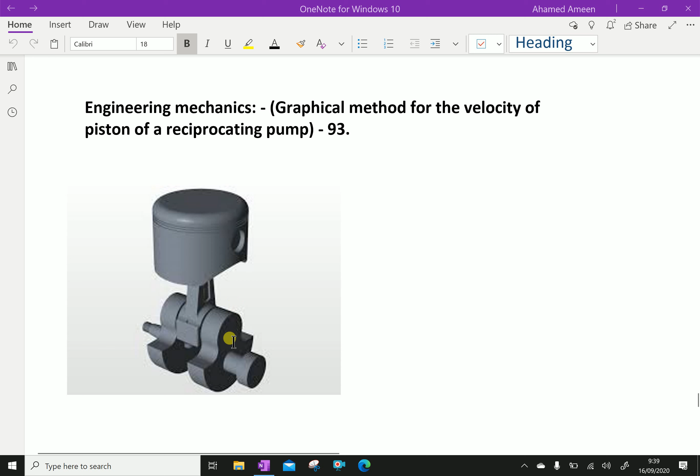In engineering mechanics, let us discuss the graphical method for the velocity of the piston of a reciprocating pump. Look at this piston crankshaft arrangement, where the rotational motion of a crankshaft is converted to reciprocating motion of the piston. The piston is connected with the connecting rod to the crankshaft.

We have to find the velocity of the piston using the graphical method, as discussed below. Look at this figure. This is the crank, suppose here AB is the crank. Then point C here, and BC is the connecting rod.

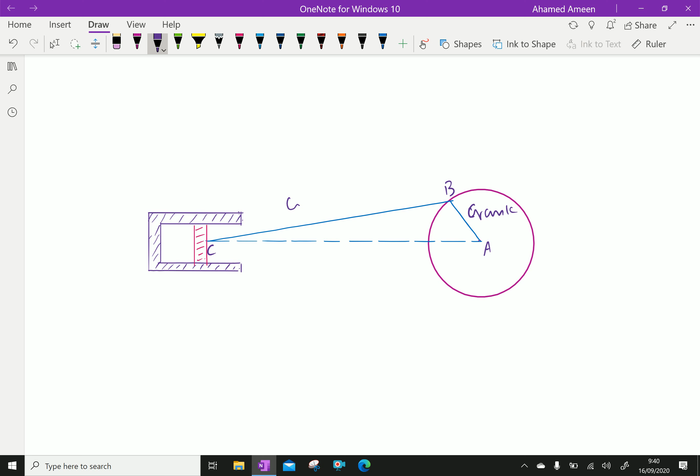Due to the reciprocating motion of the piston, it is converted to rotational motion of the crank. Let this be VC, the velocity of the point C in the horizontal position, and let this be point D.

Now here the crank AB makes angle theta at a particular instance to the horizontal. Now the crank is rotating in this direction. First of all we have to select a suitable point A, which is the center of the crank. Draw a circle with radius equal to AB, that is the crank length of the mechanism.

This is called the crank length mechanism, AB is the crank length. Through A, draw a horizontal line meeting the circle at D and extended. This DA is the inner dead center, and the line AD is extended up to point C.

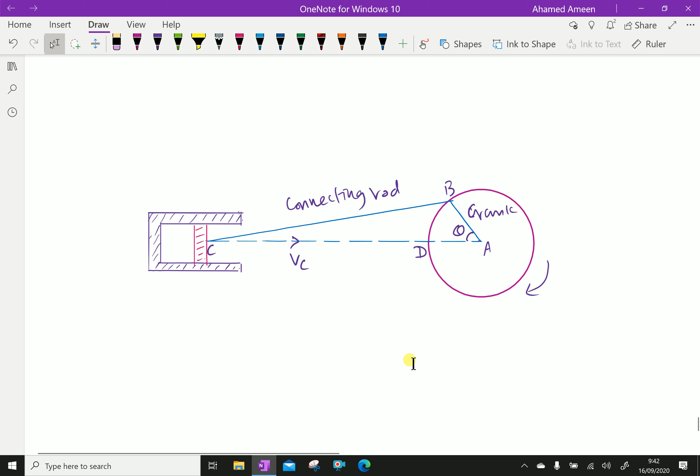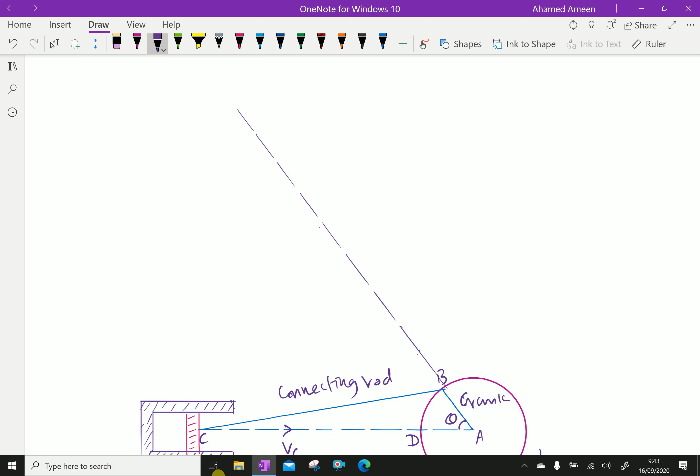We have to draw a line connecting AB. From this piston, draw a perpendicular, then join them both. Let this point be O, that is the instantaneous center.

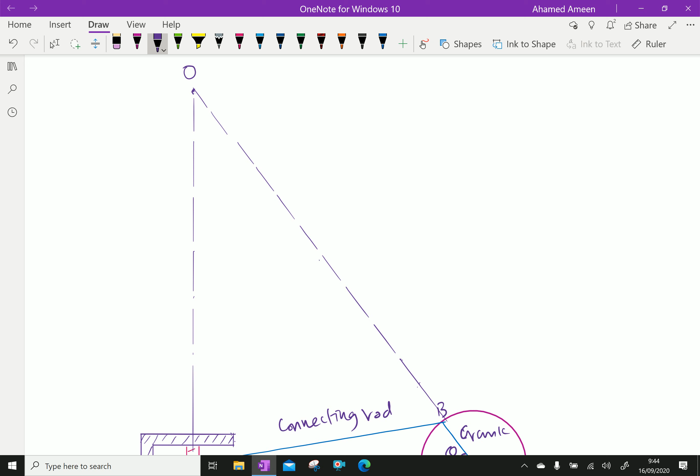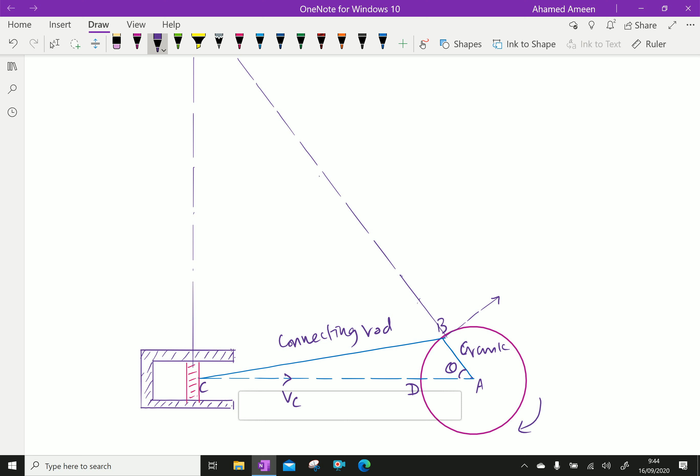Now draw perpendicular to AB, that is VB. Measure the length OB, and OC.

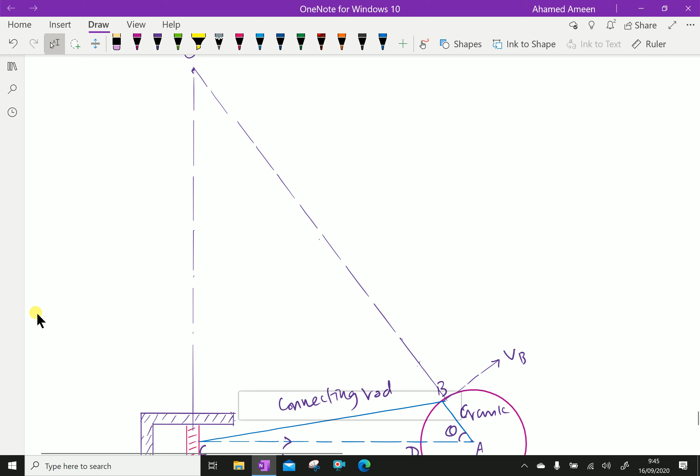Use a suitable scale, and we can let something now here: omega 1. Let omega 1 be the angular velocity of the crank AB, which can be found by 2 pi n by 60 also, because n is RPM.

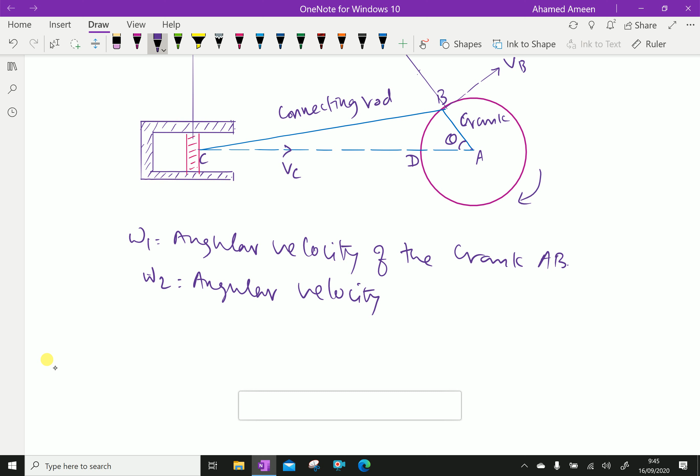Then omega 2 is the angular velocity of the connecting rod BC, about O, in radians per second. Both are about O, in radians per second.

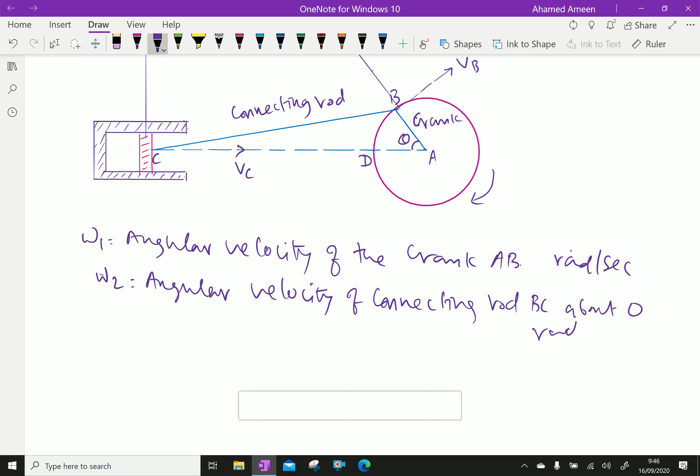Now R equals the radius of the crank AB, the radius of crank AB.

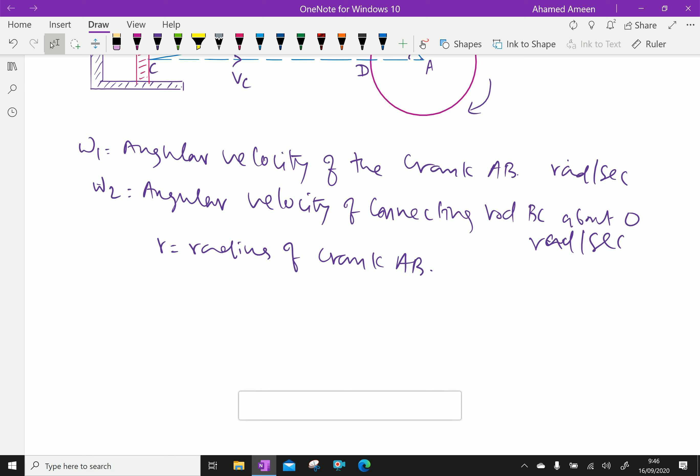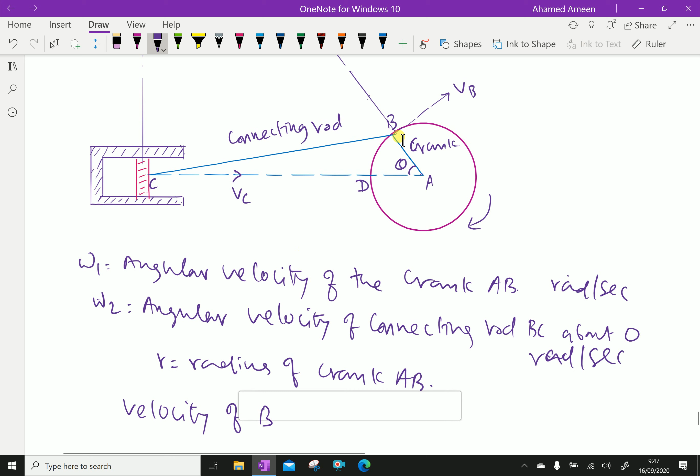Now the velocity of B is: we know that omega 1, the angular velocity of that one, into the length OB. We also know that the velocity of B is equal to omega 2 into AB also.

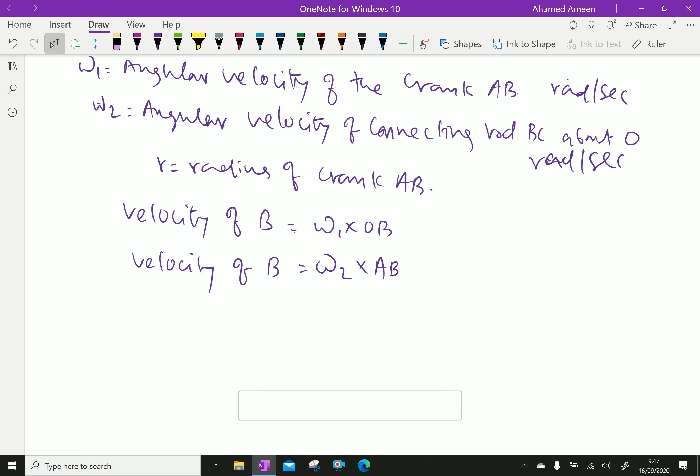Because omega 2 is the angular velocity of the connecting rod BC about O, and omega 1 is the angular velocity of the crank AB in radians per second, therefore we have VB equals omega 1 into OB, and VB equals omega 2 into AB. Both are equal. Therefore equating, omega 1 into OB equals omega 2 into AB.

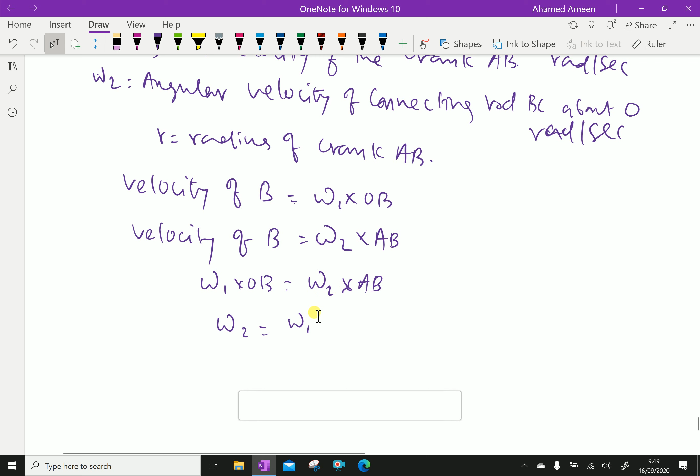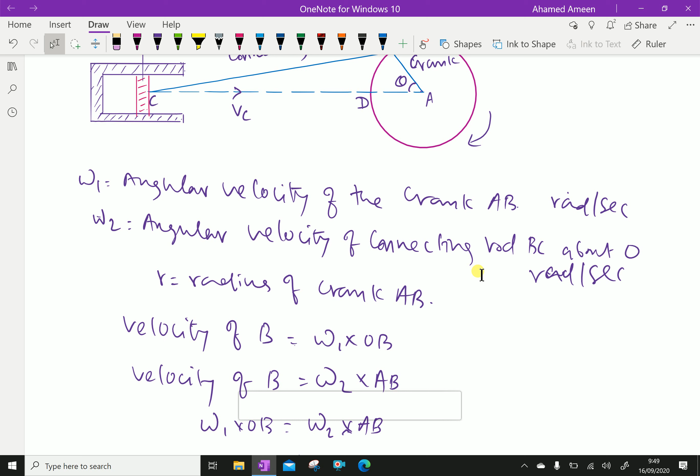From that we can write: omega 2 equals omega 1 into AB over OB. Correcting a small mistake: both are equal, we can write omega 1 into AB equals omega 2 into OB. Therefore, omega 2 equals omega 1 into AB over OB.

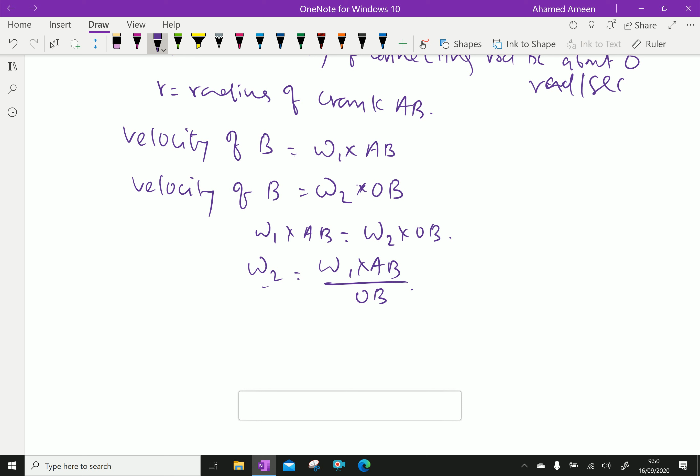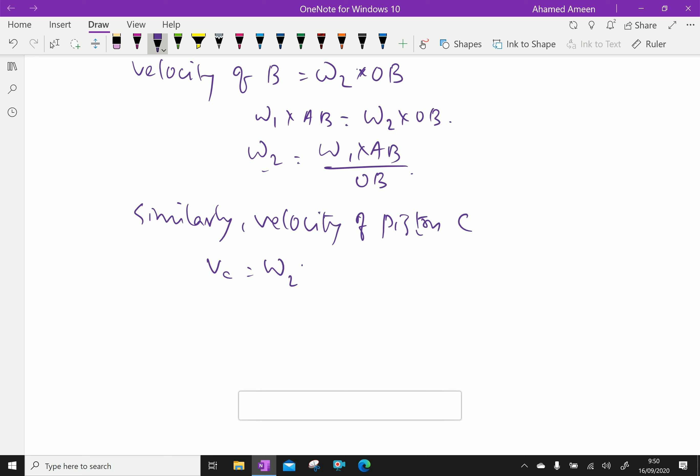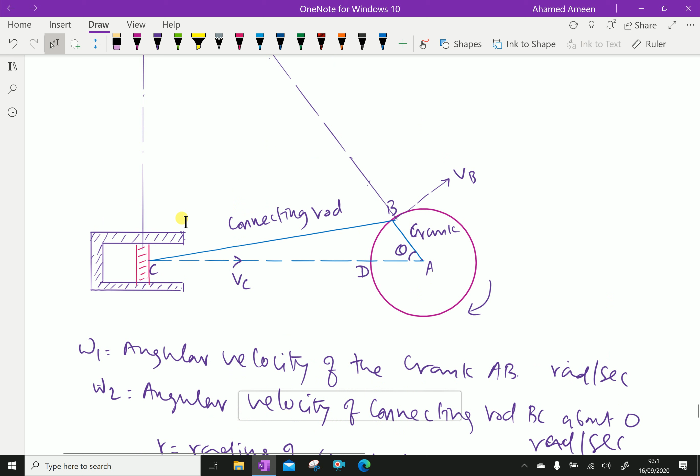Similarly, the velocity of the piston, velocity of piston C, we can write VC equals omega 2 into OC. Here the velocity of the piston is omega 2 into OC.

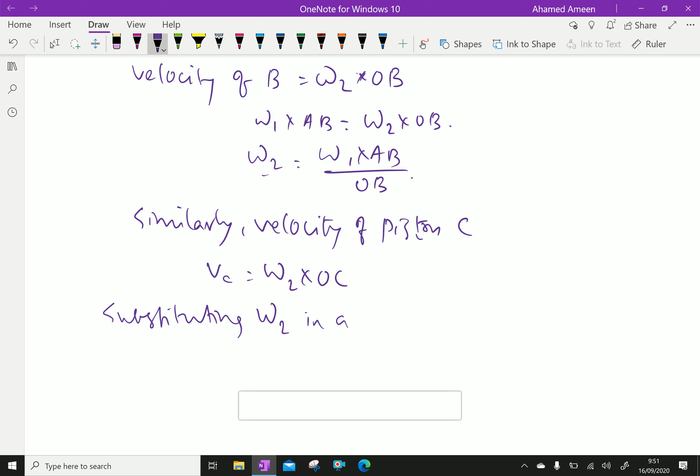Now by substituting the value of omega 2 above, we get VC equals omega 1 into AB over OB, into OC, which is equal to omega 1 into AB, which is the radius of the crank R, into OC over OB.

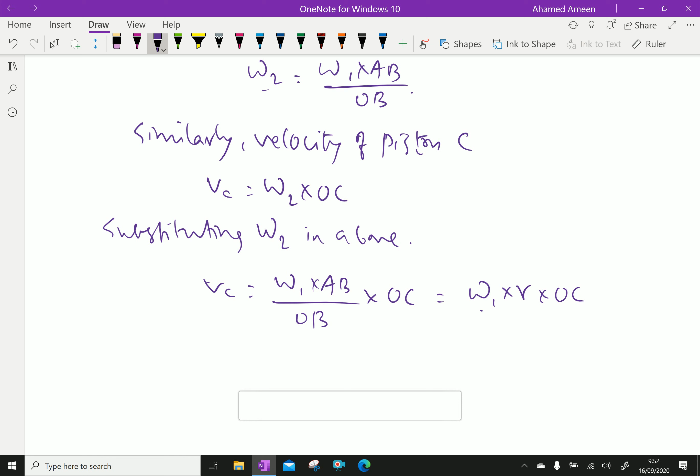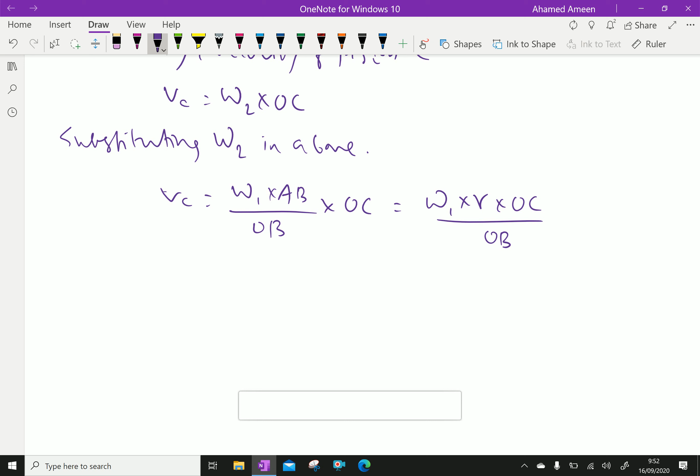Therefore, from this we can find the velocity of the crank. VC, the velocity of the crank, is omega 1, the angular velocity of the crank, into R, which is equal to VB into OC by OB. Here R omega 1 is VB, into OC by OB.

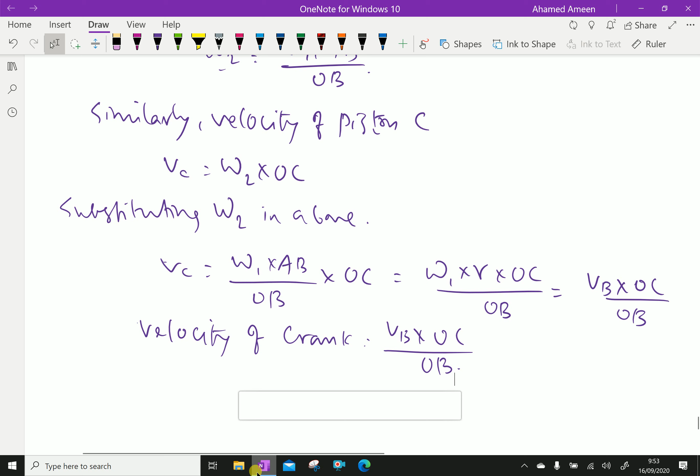Here OC and OB can be measured from the drawing, measured from these graphs. From that we can find the velocity of the crank: VC equals VB into OC by OB.